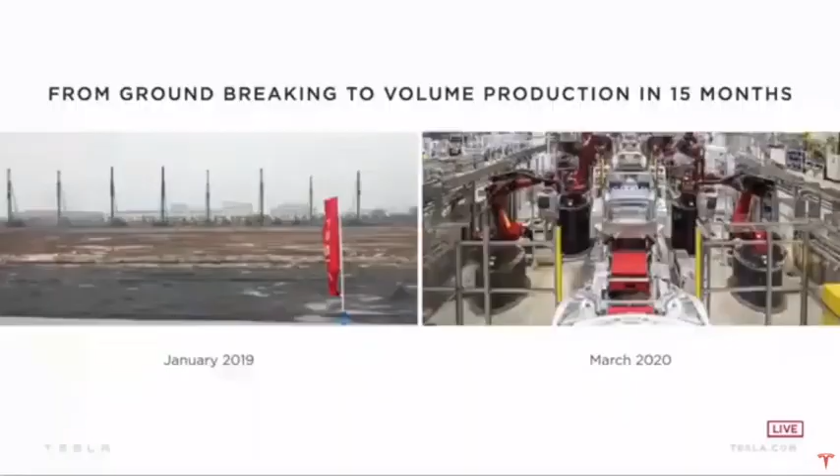From, in terms of our ability to create a factory, huge kudos to the Tesla Shanghai team for being able to go from literally a dirt pile to volume production in 15 months. It's like, damn. Yeah.

Det her er seriøst verdensrekord og virkelig vildt, at Tesla har kunnet bygge en fabrik fra ingenting til volume production på 15 måneder, altså fra ingenting til nogle af verdens største bygninger, der kan producere omkring 500.000 biler om året på bare 15 måneder.

En af de vigtigste ting ved Tesla er, at det sværeste at bygge ikke er maskinerne eller bilerne, det er maskinerne der laver maskinerne. Tesla bliver hele tiden så meget bedre til at bygge deres biler, så de kan lave flere biler, bygge flere fabrikker, gøre det hurtigere og billigere. Det er en af de vigtigste egenskaber ved Tesla, og hvorfor de vil komme til at udkonkurrere så mange andre af de klassiske gammeldags bilfabrikanter.

You know, we really try to tell these companies, hey, you really need to do this, or you won't exist in the future. Fordi Tesla hele tiden rykker hurtigere.

De bevæger sig med en eksponentiel kurve, og de lærer af deres fejl og implementerer det med det samme. Det bliver spændende at se, hvor hurtigt det går med fabrikken nede i Tyskland, og hvornår vi kan begynde at se Model Y'er her i Danmark produceret nede i Tyskland.

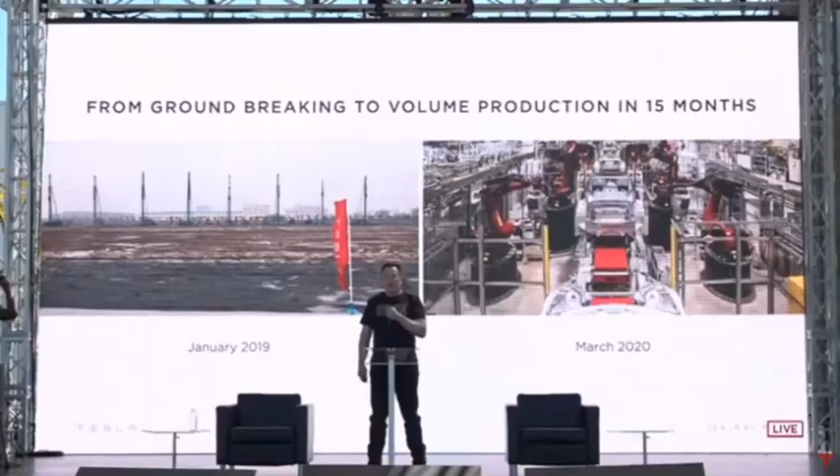And I think something that's really quite noteworthy here is Tesla is the only foreign manufacturer to have a 100% owned factory in China. Foreign factory in China is a really big deal. Over time, a factory that produces over 1 million vehicles a year.

The hardest thing is scaling production, especially of a new technology. It's insanely difficult. Making a prototype is relatively easy.

Tesla was really the first company in about a century in the US, the first US company in the US to reach volume production and be sustainably profitable. Like the crazy thing is this has really not happened in 100 years.

And we now have 4 vehicles in volume production, S3XY. So also the toughest joke, I think maybe ever. It was a very difficult joke to make.

En ting, som du sikkert godt ved, er at Teslas biler er Model S, Model 3, Model X og Model Y, og det staver selvfølgelig sexy. Det var egentlig meningen, at Model 3 skulle hedde Model E, men det ville Ford ikke tillade.

Så det har altså været rigtig svært for Elon at prøve at lave den her joke med at skrive sexy, og hvis du kigger på nogle af de fremtidige biler, der kommer ud, vil du også kunne se, at de vil stave ordet cars, altså sexy cars.

Det er noget af det, jeg synes er så fedt og sjovt ved de her Tesla-biler, og det er også det man oplever, når man sætter sig ind i en og kører i en, at man virkelig kan se, de har det sjovt med det, og at de laver de ting, som brugerne gerne vil have, uden man nødvendigvis selv ved det. Der er så mange Easter eggs og alt muligt rundt omkring, som gør det til en leg og en ny oplevelse hver gang man kører en Tesla. Det er super fedt, at der ikke er alt det her bureaukrati, men at de laver de ting, som bare er fede at lave.

We also introduced the lowest cost solar in the US. It's only $1.49 a watt, so reduced sales and advertising. It got rid of a bunch of unnecessary costs.

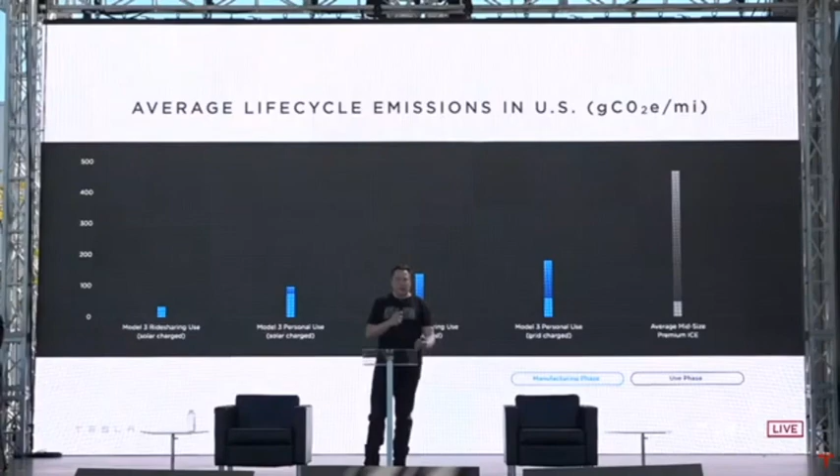It's worth looking at the average life cycle emissions in the U.S., and just how much better a Tesla, or an electric car, is than any kind of gasoline car. We also have safety at the core of our design. The Tesla cars are the safest cars ever designed. We have the lowest probability of injury of any cars ever tested by the U.S. government, and that's just passive safety. When you add active safety into that, it's even better. If safety is important to you, which obviously it is, the safest car you could drive is a Tesla. Safety is paramount. It is actually the #1 design objective when we build a Tesla. The U.S. average for collisions is roughly 2.1 per million miles, and with autopilot engaged, it's 0.3. I mean, this is a profound difference. It's really massive, and this will get even better.

We're now labeling in 3D video. With our new labeling tools, we label it in video, so we actually label entire video segments with the surround video and with time. So it's now taking all cameras simultaneously and looking at how the images change over time and labeling that. We'll hopefully release a private beta of Autopilot, or the full self-driving version of Autopilot, in about a month or so, and then people will really understand the magnitude of the change. It's profound. I call it like 4D in the sense that it's 3 dimensions plus time.

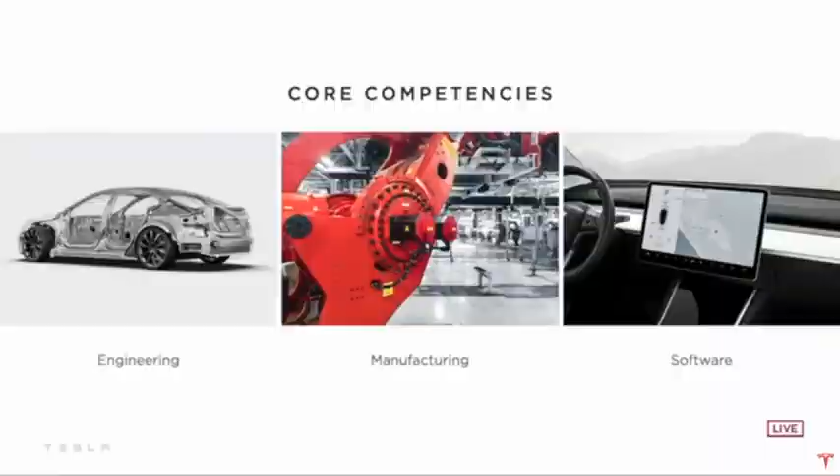Tesla core competencies: we've got engineering, obviously, but also manufacturing. I think manufacturing is underappreciated in general. The difficulty of designing the machine that makes the machine is vastly harder than the machine itself. Making a Model 3 or Model Y or Cybertruck prototype is really quite trivial compared to designing the factory that makes it. It's at least 10 to 100 times harder to do the factory than the prototype. That's why you see a lot of companies or startups bring out a prototype, but they just can't get it over the hump for manufacturing, because manufacturing of new technology especially is the hardest thing by far—at best 10% of the difficulty, and probably closer to 1%. And then software. Tesla is both a hardware and a software company. A huge percentage of our engineers are actually software engineers, and you can think of our car as kind of like a laptop on wheels.

Der er virkelig så mange guldkorn af Elon Musk her, så jeg vil prøve at lade være med at kommentere alt for meget for at afbryde det. Men det her med, at Tesla er en softwarevirksomhed, der desuden har stærke kompetencer for engineering og for manufacturing, det er virkelig vigtigt. Og som Elon Musk siger, så er Tesla ikke en bil, men det er en computer med hjul på. Og det vil du også opdage. Jeg var faktisk ude at prøvekøre her i weekenden Audi og Folkevogn elbiler, og der var ingen sammenligning med Tesla. Det føles mere som at køre en normal bil, som har fået en elmotor, hvorimod når man kører en Tesla, så kører man en Tesla.

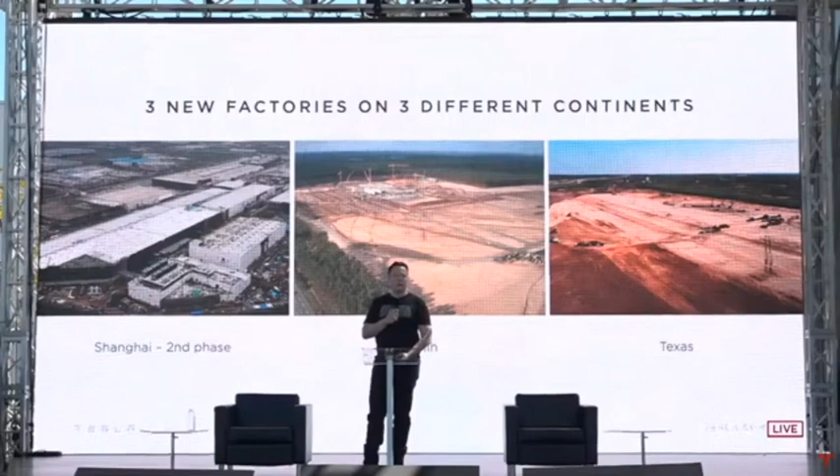With each factory, what we're trying to do is also improve the manufacturing technology. So in some cases, like the Model Y made in Berlin, it might look the same, but it's actually made in a much more efficient way.

We launched Megapack, a 3 megawatt hour all-in-one energy storage solution. So it's been great overall. In addition to the battery stuff, we got a few extras as well. I think you'll really like what we have to say on batteries.

The battery stuff we're going to talk about is truly revolutionary and essential to Tesla's goal - the fundamental good of Tesla. If you look back in history and ask what good did Tesla do, the good will be measured by how many years we accelerated sustainable energy. That's the true metric of success.

Hello everyone, I'm Drew Baglino, SVP of Powertrain and Energy Engineering at Tesla, and I'm incredibly excited to talk about what we've been doing at batteries here at Tesla. So let's see, you got the clicker? Yeah, I've got the clicker. Okay, I'll take it first, perhaps.

Obviously the issues we're facing are very serious, with climate change, and we're experiencing these issues on a day-to-day basis. It's incredibly important we accelerate the advent of sustainable energy. Time really matters. This presentation is about accelerating the time to sustainable energy. The past 5 years were the hottest on record. This time is not like the past. It's really important that we take action.

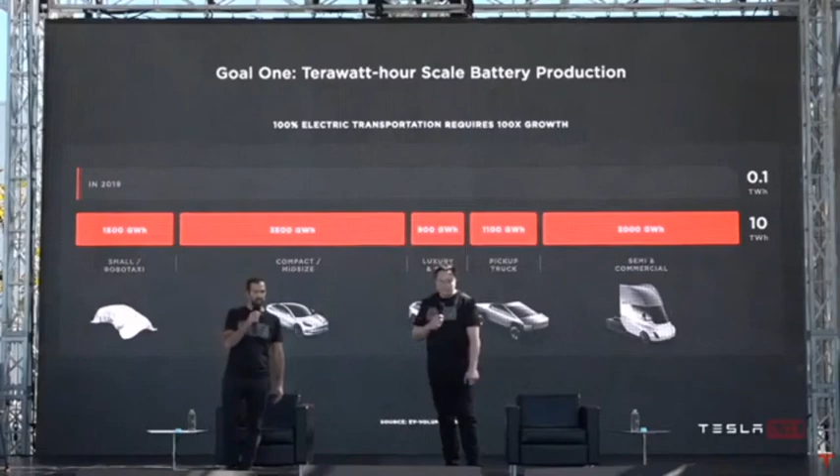Goal number one is terawatt hour scale battery production. Tera is the new giga. We're talking about 100x growth in batteries for electric vehicles to achieve this mission. And we are going to get there - it's just a matter of how fast, and our intention is to accelerate it.

You basically need on the order of roughly 10 terawatt hours a year of battery production to transition the global fleet of vehicles to electric. And the average vehicle lasts 15 years, so we're talking about 150 terawatt hours, give or take, to transition all vehicles of all types to electric. So it's a lot of batteries, basically.

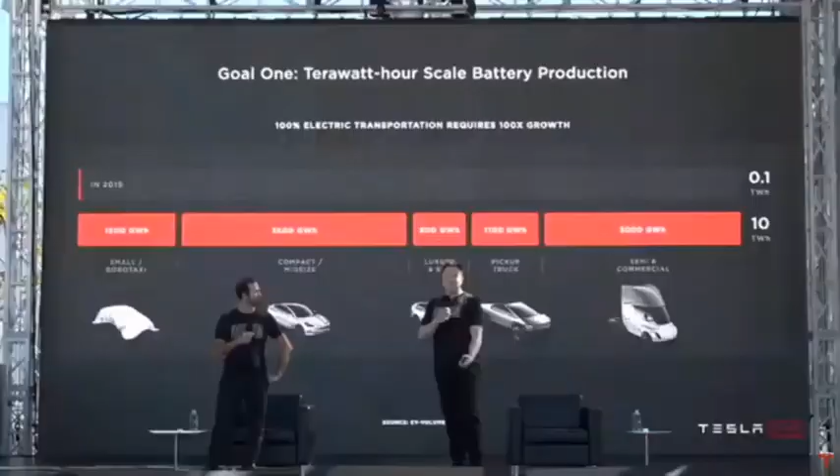Today's batteries cannot scale fast enough. They're just too small. We would need 135 fully built out Nevada gigafactories to achieve 20 terawatt hours a year. It's not a scalable enough solution. We need a dramatic rethink of the cell manufacturing system to scale as fast as we can and should.

Goal two, obviously, we need to make more affordable cars. One of the things that troubles me the most is that we don't yet have a truly affordable car, and that is something we will make in the future. That's why we got Battery Day. To make the best cars in the world, we design vehicles and factories from the ground up, and now we do this for batteries as well.

It's weird, the slides don't show up quite right. What shows up on the screen is not quite what shows up there. Oh, okay, it's different. I think it's because that one's current, supposed to be current. Anyway, so let's get started.

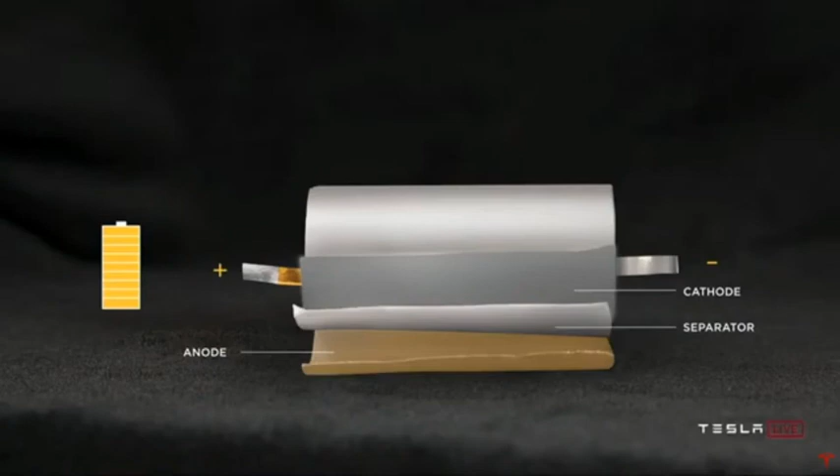We have a plan to halve the cost per kilowatt hour. So first, before we get too far into it, let's talk about what is in a battery cell. We've got the cap and the can, negative and positive terminals of the cell. When you open that cell, you've got a tab connected to those terminals, what we call the jelly roll, which is the wound electrodes on the inside. To explain what's actually going on here, we've identified anode, cathode, separator, positive and negative terminal.

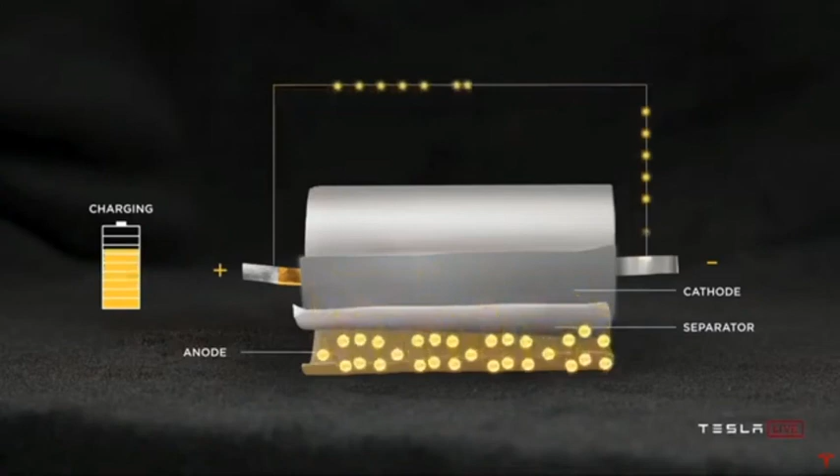Watch what happens as we discharge the cell. We've got lithium moving from anode to cathode, and then the reverse. When we charge the cell, lithium moves from cathode to anode across the separator. This is the basic of what makes all lithium-ion batteries, no matter what the form factor is.

There are problems as you make cells larger. In fact, supercharging and thermals in general become really challenging as you make bigger cells. And this was the challenge that our team set our sights on to overcome.

Basically took the existing foils, laser patterned them, and enabled dozens of connections into the active material through this shingled spiral you can see. With simpler manufacturing, fewer parts, 50 millimeter versus 250 millimeter electrical path length, which is how we get all the thermal benefits.

This is important to appreciate. The distance that the electron has to travel is just much less. So you actually have a shorter path length in a large tabless cell than you have in the smaller cell with tabs. This is a big deal.

So even though the cell is bigger, it actually has more power. The power to weight ratio is actually better than the smaller cell with tabs. This is quite hard to do. Nobody's done it before.

There's a whole bunch of things that we're keeping a little secret sauce here that we're not telling everything. I think it may sort of sound a bit silly to some people, but for people that really know cells, this is a massive breakthrough.

It's a video of some of what's going on in the plant.

It will take about a year to reach the 10 gigawatt hour capacity with the pilot plant. And this is just a pilot plant—the actual production plants will be more on the order of maybe 200 gigawatt hours, maybe more over time.

But let's stack up everything we just saw at the cell level. Just the cell form factor change enables a 14% dollar per kilowatt hour reduction. And now that you've been teased on this factory, we're going to walk step by step through it and discuss a series of innovations.

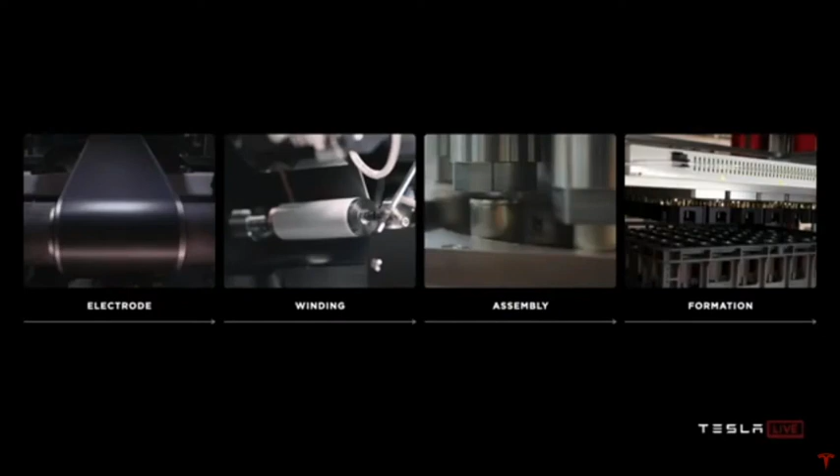Let's talk about what's in a cell factory. First, there's an electrode process where active materials are coated into films onto foils. Then those coated foils are wound in the winding process, where if you have tabs, you have to start and stop a lot. Then the jelly roll is assembled into the can, sealed, filled with electrolyte, and sent to formation, where the cell is charged for the first time.

Wouldn't it be great if we could skip that solvent step, one of those dig-a-ditch-and-fill-it kind of things where you put the solvent in and then take it out and recycle it? You can see it here on a bench top—literally powder into film, as simple as that.

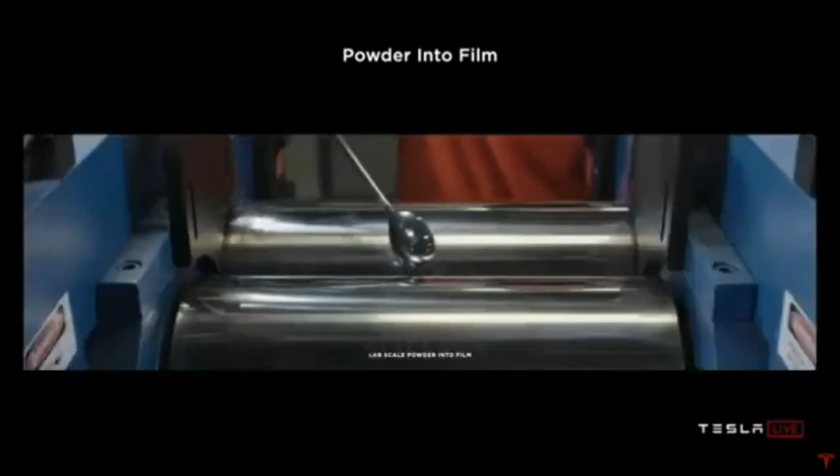I mean, it's hard, actually, just to be clear. If this was easy, everyone would do it. So it's not like dry coating electrode is actually easy—it's actually very hard to do what appears to be a simple thing. It's insanely difficult to scale up.

But as Elon was saying, simple is hard. There's a clear path to success, but a ton of work between here and there. This is a really profound improvement—for people that know battery manufacturing, this is gigantic. And beyond the electrode, we continue to innovate on every other process step.

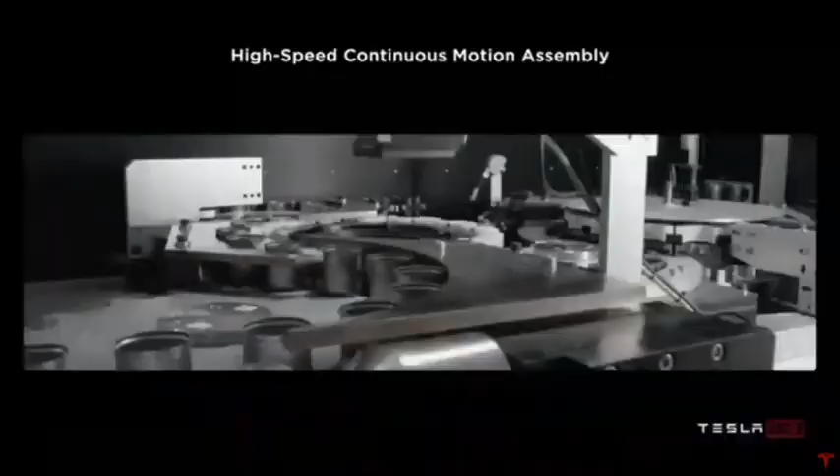So let's talk about assembly, which is next. The key to a high-performing assembly line is accomplishing processes while in continuous motion, thinking of the line as a highway—max velocity down the highway, no start and stop, no city driving. Exactly, no stoplights and traffic lights. You want the highway. I want the highway.

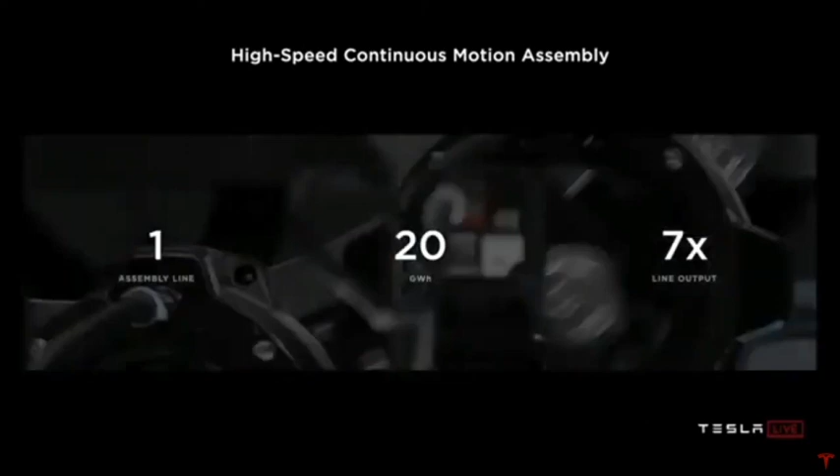Through all of that development, we were able to get to the point where we can implement assembly lines—one line, 20 gigawatt hours, a 7 times increase in output per line. When you're thinking about scalability and pure effort, having one line be 7x the capability is just effort multiplying.

You can think about the fundamental physics of a factory. It's actually quite a lot like the rocket equation, where you've got your exhaust velocity and then the log of the start-to-end masses. So it's basically saying, how fast are things going and what percentage of the factory volume is doing useful work—conveyance does not count as useful work.

If you break the factory down into cubic meter sections, or smaller—like one liter sections—is a majority of this volume doing useful work? You would be astounded at how bad most factories are. They're like maybe 2 or 3%, including our factory in Fremont. I think it is possible to get to at least 10 times that volumetric efficiency, so more like 30% ish, maybe more—10x better, which means the factory can be 10 times smaller. And then the other thing is how fast things are going through the factory. It's like speed and density.

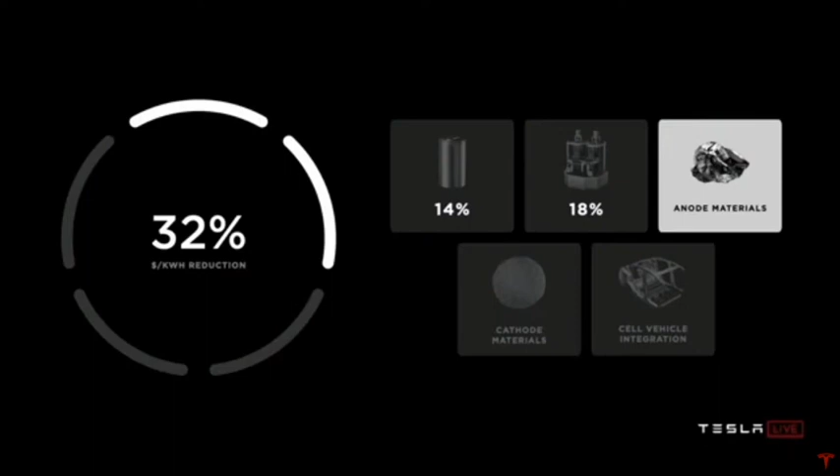And not only is all of that manufacturing innovation fantastic for enabling scale, it's also an additional 18% reduction in dollar per kilowatt hour at the battery pack level. But wait, there's more. But wait, there's more.

So we have a manufacturing system. We've got a cell design. What are the active materials we're going to put in that cell design? Let's talk about the anode first.

Let's talk about silicon. Why is silicon awesome? It's awesome because it's the most abundant element in the Earth's crust after oxygen, which means it's everywhere. It's sand, yeah, sand is silicon dioxide. And it happens to store 9 times more lithium than graphite, which is the typical anode material in lithium-ion batteries today. So why isn't everybody using it?

The main reason is because the challenge with silicon is that it expands 4x when fully charged with lithium. Basically, with silicon, the cookie crumbles and gets gooey. That's basically what happens. Good analogy.

What we're proposing is a step change in capability and a step change in cost. And what that really is, is to just go to the raw metallurgical silicon itself. Don't engineer the base metal, just start with that and design for it to expand in how you think of the particle in the electrode design and how you coat it.

And I'm not sure if you saw this, basically $1 per kilowatt hour. Basically, if you use simple silicon, it's dramatically less than even the silicon that is currently used in the batteries that are made today. And you can use a lot more of it. The anode would cost, with this silicon, $1.20 a kilowatt hour.

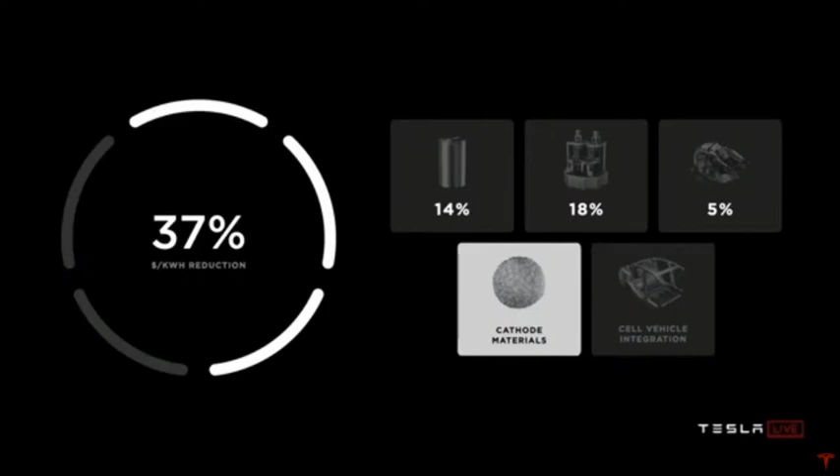And in the end, by leveraging this silicon to its potential, we can increase the range of our vehicles by an additional 20%, just from this improvement. It gets cheaper and longer range. And when we take that anode cost reduction, we're looking at another 5% dollar per kilowatt hour reduction at the battery pack level. And there's more.

Let's talk about cathodes. What is a battery cathode? Cathodes are like bookshelves, where the metal - the nickel, the cobalt, the manganese, or aluminum - is like the shelf, and the lithium is the book. It's tough to exactly figure out what the right analogy is to explain cathode and anode, but a bookshelf is probably a pretty good one, in the sense that you need a stable structure to contain the ions.

So you want a structure that does not crumble or get gooey, that holds its shape in both the cathode and the anode. As you're moving these ions back and forth, it needs to retain its structure. If it doesn't retain its structure, then you lose cycle life and your battery capacity drops very quickly.

You can see nickel is the cheapest and the highest energy density, and that's why increasing nickel is a goal of ours and really everybody's in the battery industry. That's what we've been working on with our high nickel cathode development, which has zero cobalt in it. Leveraging novel coatings and dopants, we can get a 15% reduction in cathode dollar per kilowatt hour. It's a big deal.

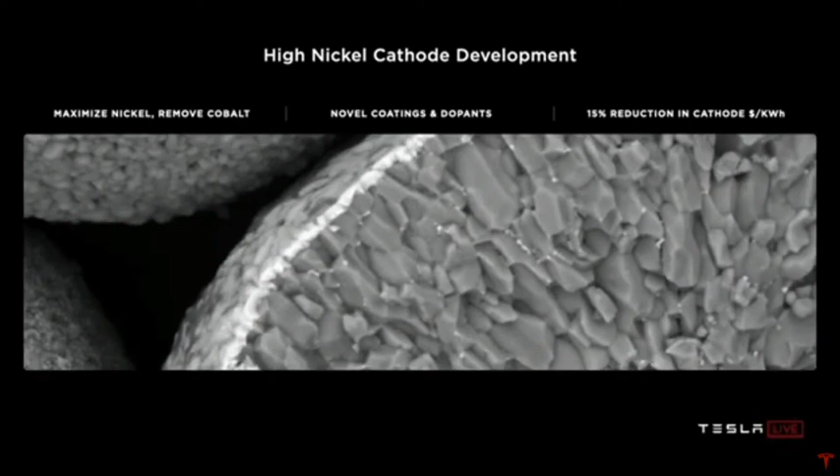In order to scale, we really need to make sure that we're not constrained by total nickel availability. I actually spoke with the CEOs of the biggest mining companies in the world and said, please make more nickel. It's very important. And so I think they are going to make more nickel.

I think we need to have a kind of a three-tiered approach to batteries. Starting with iron, that's kind of like a medium range, and then nickel manganese as sort of a medium plus intermediate, and then high nickel for long-range applications like Cybertruck and the semi.

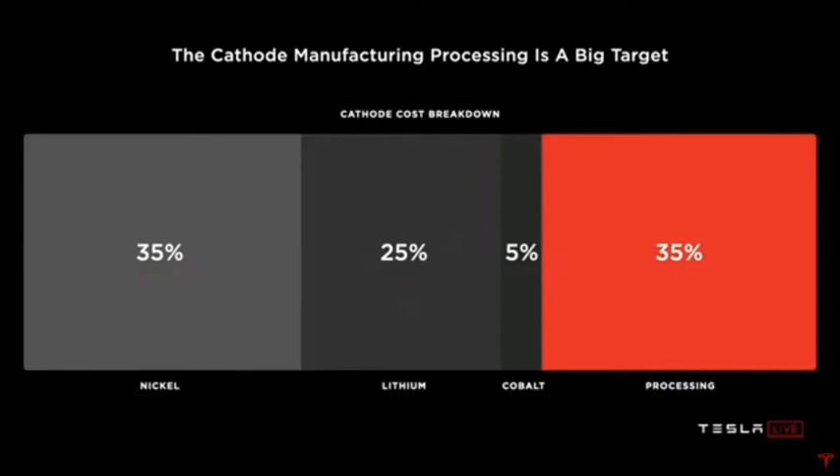A lot of people spend time talking about the metals, but actually the cathode process itself is a big target. 35% of the cathode dollar per kilowatt hour is just in transforming it into its final form. So we see that as a big target, and we decided to take that on.

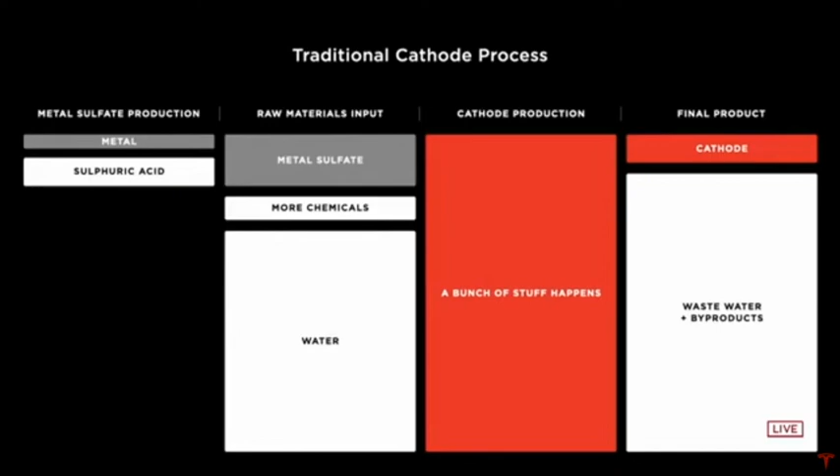Here's a view of the traditional cathode process. Effectively, if you have the mine, then you get an intermediate metal, and you can make the cathode. Then you make the intermediate, and at the end, you get that little bit of cathode and a whole bunch of wastewater and byproducts.

Yeah, it's insanely complicated. If you look at the total, it's like a small world journey of 'I am a nickel atom' - what happens to me? It's crazy, like you're going around the world three times. There's the moral equivalent of digging a ditch, filling it in, and digging it again. It's total madness, basically.

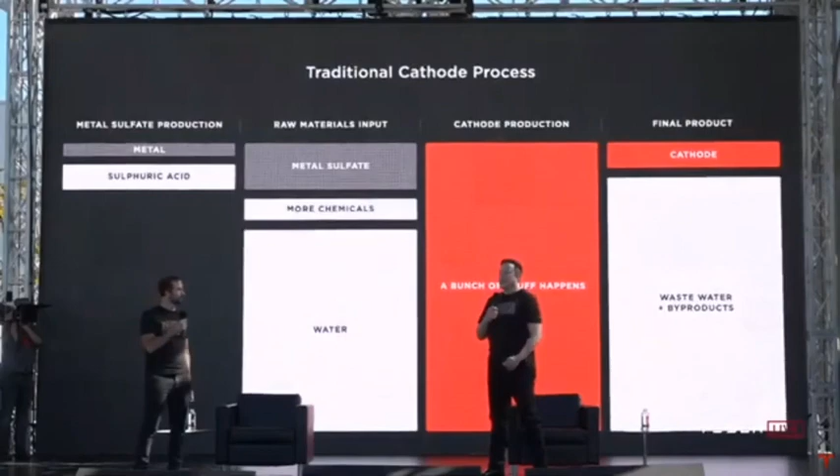These things just grew up as legacy things, it's just how it was done before. And then they connected the dots but really didn't think of the whole thing from a first principles standpoint, saying how do we get from the nickel ore in the ground to the finished nickel product for a battery. So we've looked at the entire value chain and said, how can we make this as simple as possible? That's what we're proposing here with our process.

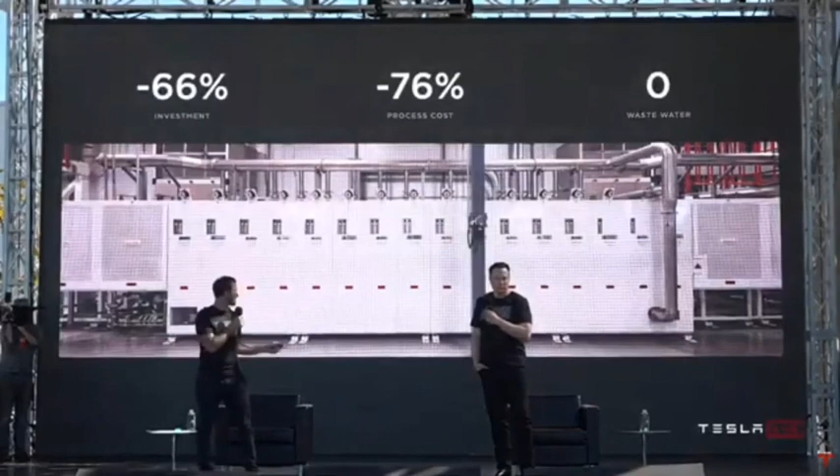As you can see, a whole lot less is going on here. We get rid of the intermediate - metal, water, final product cathode - recirculate the water, no wastewater at all. Summarize all of that: it's a 66% reduction in CapEx investment, a 76% reduction in process cost, and zero wastewater. Much more scalable solution.

We can eliminate billions in battery-grade nickel intermediate production. It's not needed at all. And now that we have this process, obviously we're going to go and start building our own cathode facility in North America, leveraging all of the North American resources that exist for nickel and lithium.

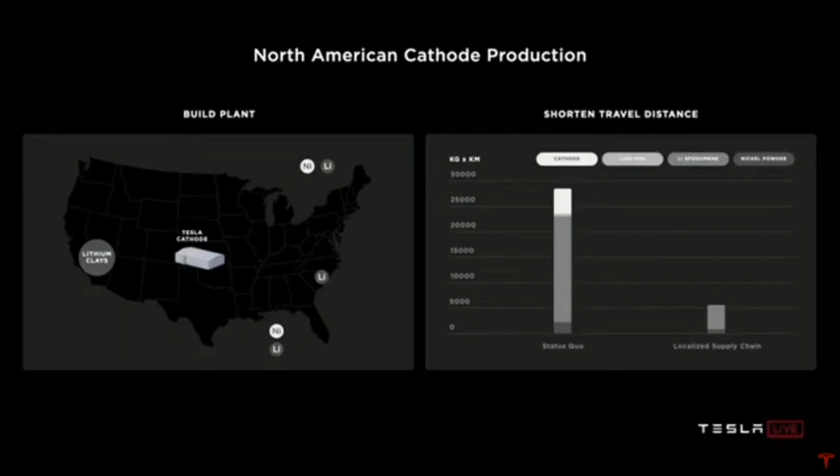So it would basically be raw materials coming from the mine, and from raw materials in the mine, out comes a battery. The way the lithium ends up in the cell is through the cathode, so we should obviously have on-site lithium conversion as well, using a new process that we're going to pioneer - a sulfate-free process again, skip the intermediate.

33% reduction in lithium cost, 100% electric facility co-located with the cathode plant. There is a massive amount of lithium on Earth. So lithium is not like oil - there's a massive amount of it pretty much everywhere.

In fact, there's enough lithium in the United States to convert the entire United States fleet to electric - all the cars in the United States, there's like 300 million or something like that. Every vehicle in the United States can be converted to electric using only lithium that is available in the United States, discovered today, what we already know exists. People really haven't even been looking, because it's just so widely available.

So it is important to say, okay, what is the smartest way to take the ore and extract the lithium, and do so in an environmentally friendly way? We actually discovered, looking at it from a first principles physics standpoint instead of just the way it's always been done, that we can actually use table salt, sodium chloride, to basically extract the lithium from the ore.

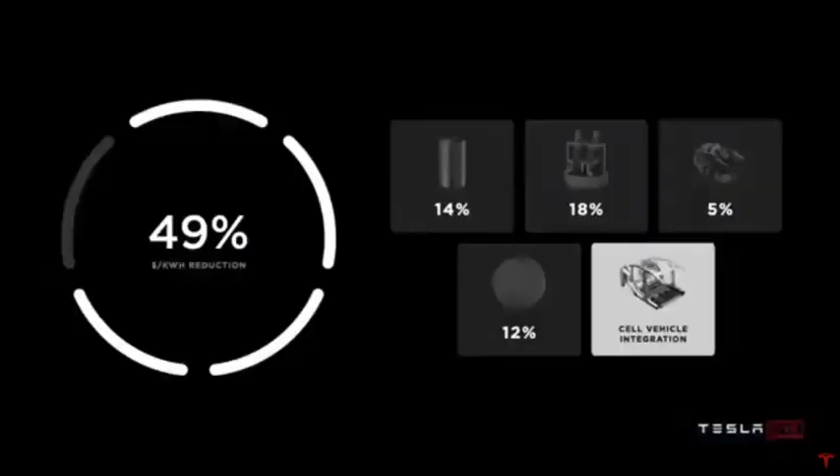All of the benefits that you just saw are added to this benefit of a 12% reduction in dollars per kilowatt hour at the battery pack level. But there's one more section. Take it away, Elon.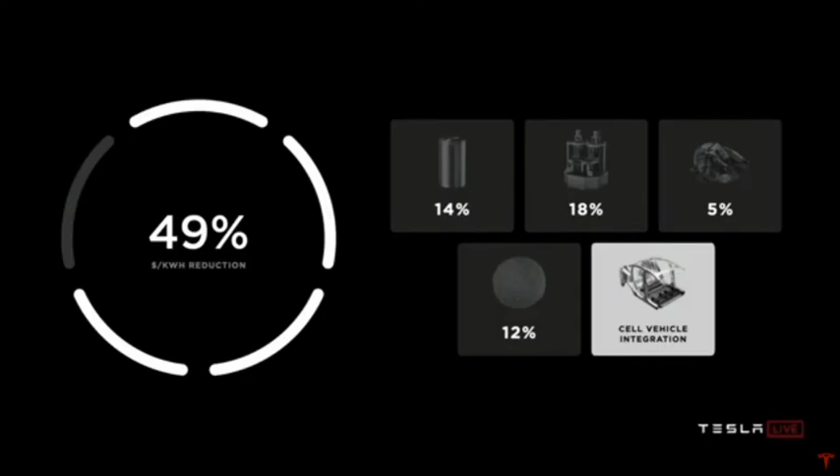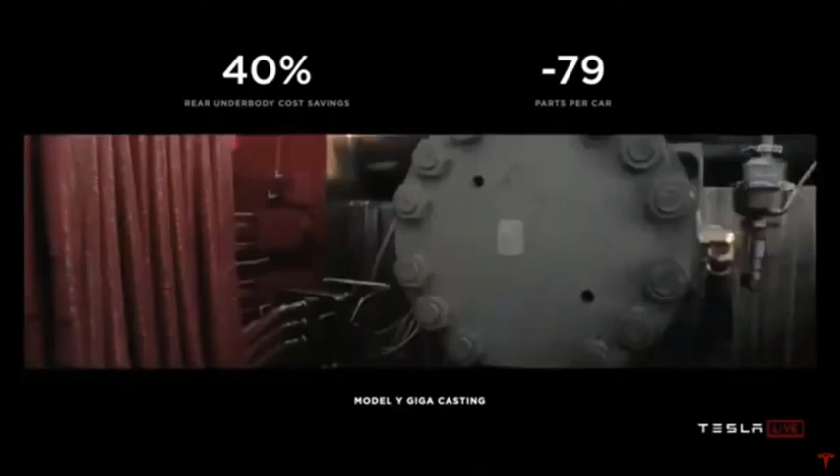There's an architecture that we've been wanting to do at Tesla for a long time, and we finally figured it out. I think it's the way that all electric cars in the future will ultimately be made. It's the right way to do things. It starts with having a single piece casting for the front body and the rear body. In order to do this, we commissioned the largest casting machine that has ever been made, and it's currently working just over the road at our Fremont plant.

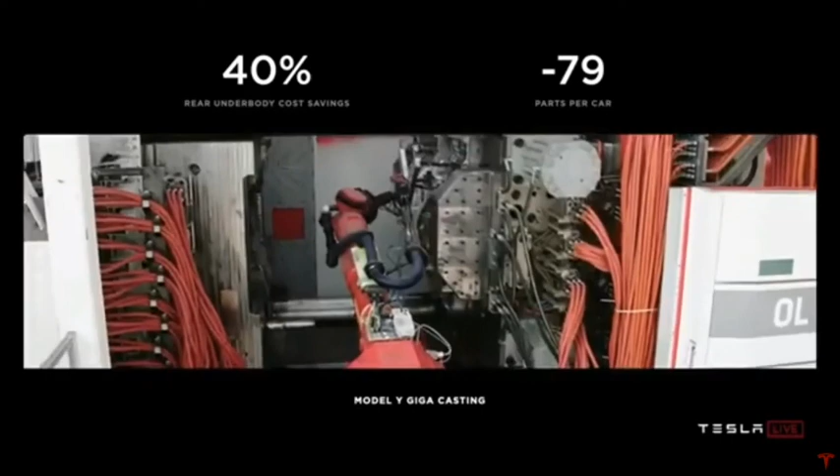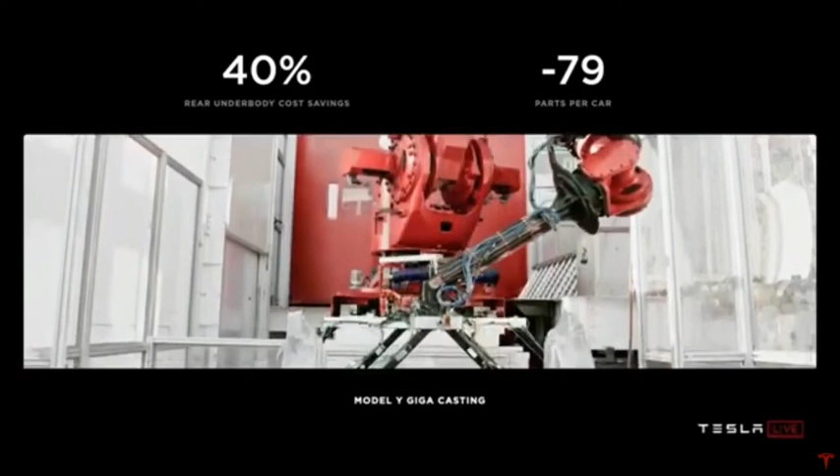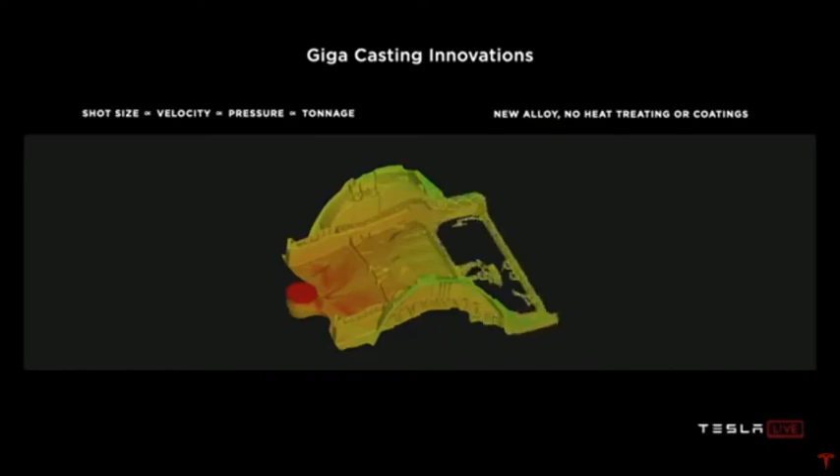It's pretty sweet, currently making the entire rear section of the car as a single piece, high pressure die cast aluminum. In order to do this, we actually had to develop our own alloy, because we wanted a high strength casting alloy that did not require coatings or heat treatment. This is a big deal for castings, especially with a large casting.

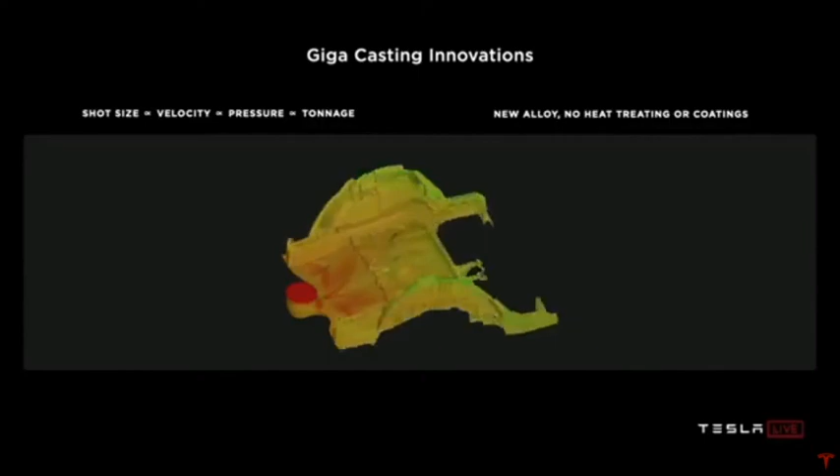If you heat treat it afterwards, it tends to deform — it kind of does this potato chip thing. So it's very hard to keep a large casting in shape. No alloy existed that could achieve this, so we developed our own special alloy of aluminum that has high strength without heat treat and is very castable. That's a great achievement of our materials team.

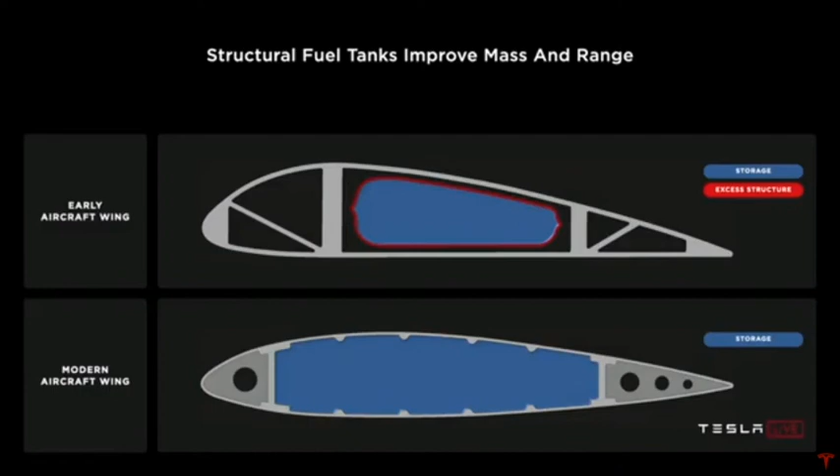This is absolutely the way things are done. In the early days of aircraft, they would carry the fuel tanks as cargo. The fuel tanks were actually quite difficult to carry, worse than regular cargo—you had to bolt them down. Then somebody said, hey, what if we just make the fuel tank in wing shape? All modern airplanes, the wing is just a fuel tank in wing shape.

This is absolutely the way to do it. The fuel tank then serves as dual structure, and it's no longer cargo—it's fundamental to the structure of the aircraft. This was a major breakthrough. We're doing the same for cars.

So this is really quite profound. The non-cell portion of the battery has negative mass, so we save so much mass in the rest of the vehicle—more than the non-cell portion of the battery itself. It also allows us to pack the cells more densely. It effectively glues the cells to the top and bottom sheet, and this allows shear transfer between the upper and lower sheet.

Just like if you have a Formula One car or a racing boat with carbon fiber face sheets and aluminum honeycomb between them, this gives incredible stiffness. It's really the way any super fast thing works—you create a honeycomb sandwich with two face sheets. This is actually even better than what aircraft do, because aircraft don't do this, which makes for an incredibly stiff structure, even stiffer than a regular car.

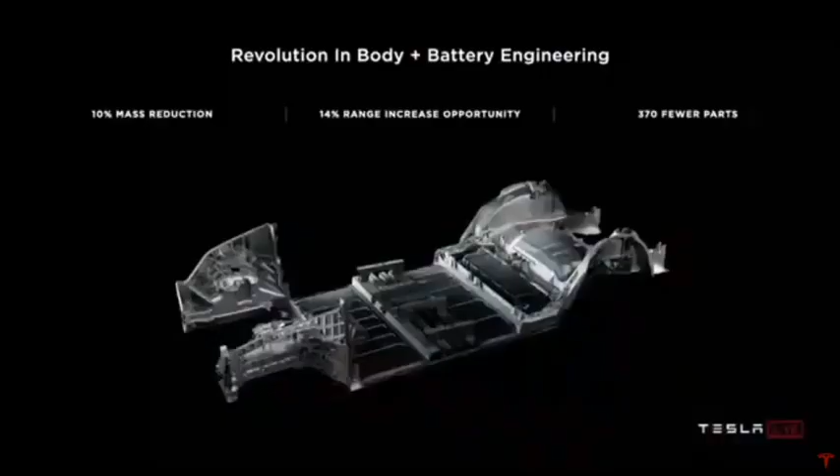So, 10% mass reduction in the body of the car, 14% range increase, 370 fewer parts. I really think that long term, any cars that do not take this architecture will not be competitive. We're looking at over 50% reduction in investment per gigawatt hour, 35% reduction in floor space, and we'll continue to improve that as we make the vehicle factory of the future. Major improvements on all fronts, from the cell all the way to the vehicle.

In addition to the improvements we just mentioned on enabling additional range and improving structural performance, it's worth another 7% dollar-per-kilowatt-hour reduction at the battery pack level, bringing our total reduction now to 56% dollars per kilowatt hour.

All right, so stacking it up, we're not just talking about cost or range. We've got to look at all the facets. Range increase, we're unlocking up to 54% increase in range for our vehicles and energy density for our energy products. 56% reduction in dollars per kilowatt hour at the battery pack level, and a 69% reduction in investment per gigawatt hour, which is the true enabler when we talk back about how do we achieve this scale problem here.

I think it's pretty nice that investment per gigawatt hour reduction is 69%. I mean, who would have thought? Yeah, just happened to happen out that way. I mean, 0.420%, of course.